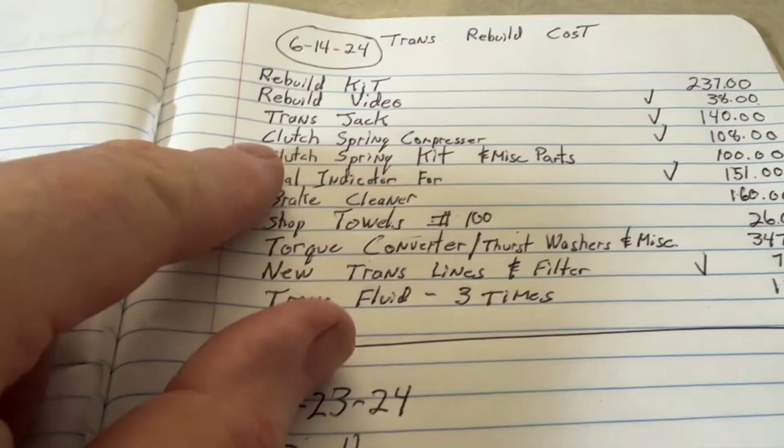Yeah, I decided to add up the cost to rebuild the transmission. Remember, I've never done it before, and I didn't have the right tools. So I got a trans jack, a clutch spring tool, some parts, a dial indicator, brake cleaner, shop towels, torque wrench. The torque converter cost $347. I don't know if I needed it, but everything with a check mark, I would not have to buy.

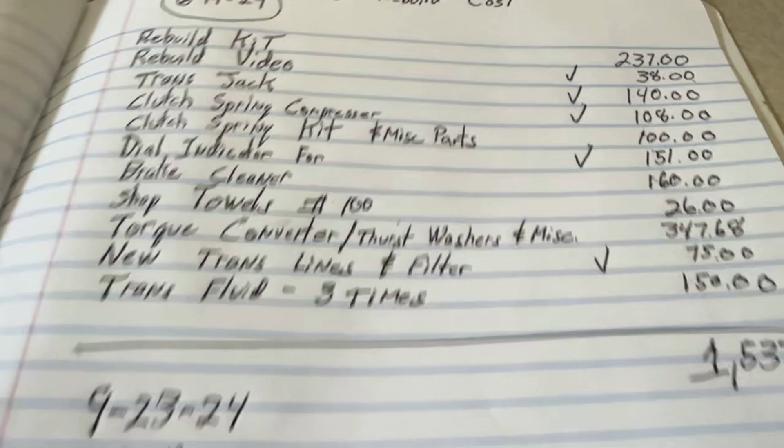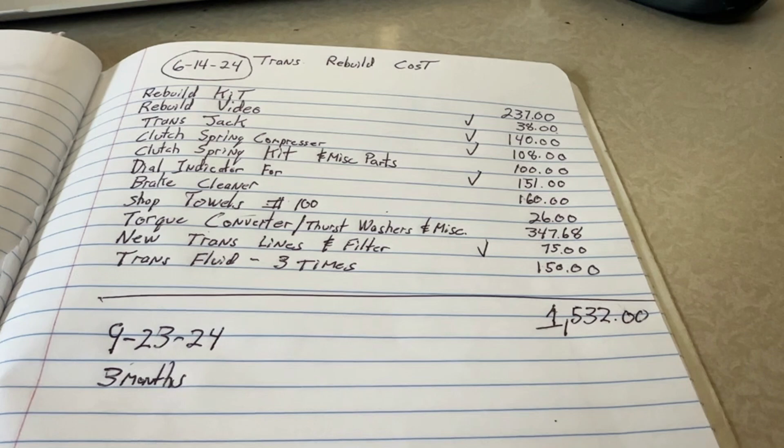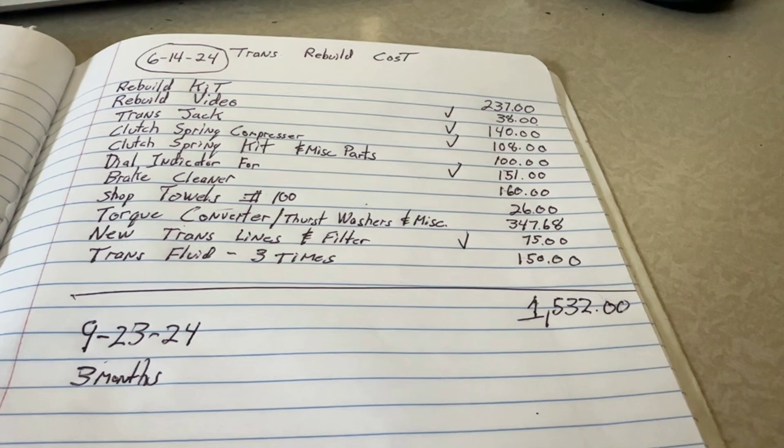But I really did it because I wanted to know how to do it. So getting back to the beginning, I asked them if I brought the transmission in, what would they charge me? They said I think it was $1,600 to $1,800. If I took the car in and they just took the transmission out and everything, it was like $3,500. I bet that didn't include the torque converter, which if you take the torque converter price off, it goes way down. So yeah, I bet if I was to do this again, I could do it for like $800.

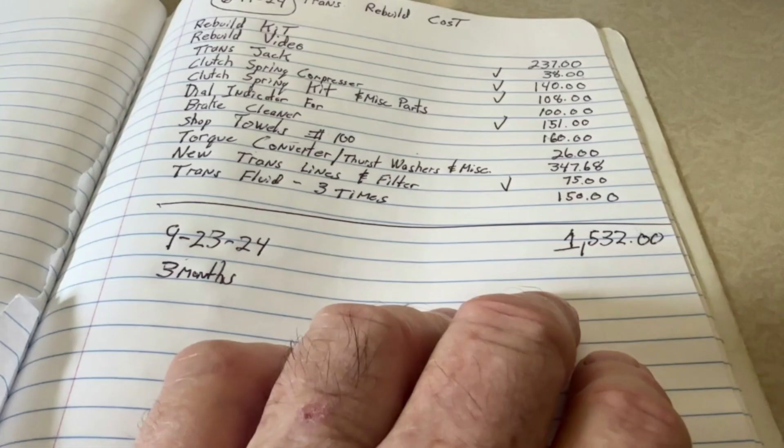Okay, I want to buy a muffler for this car, but I don't want to spend a lot of money because I don't know what's going to happen in the future of this car. I just want to see what size I got. That's my starting point.

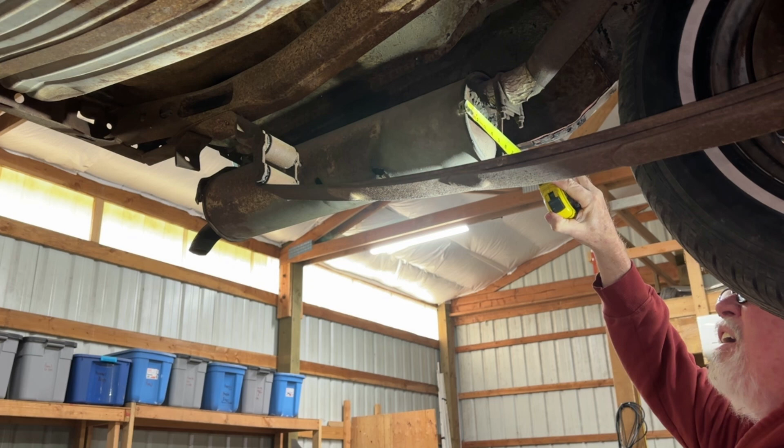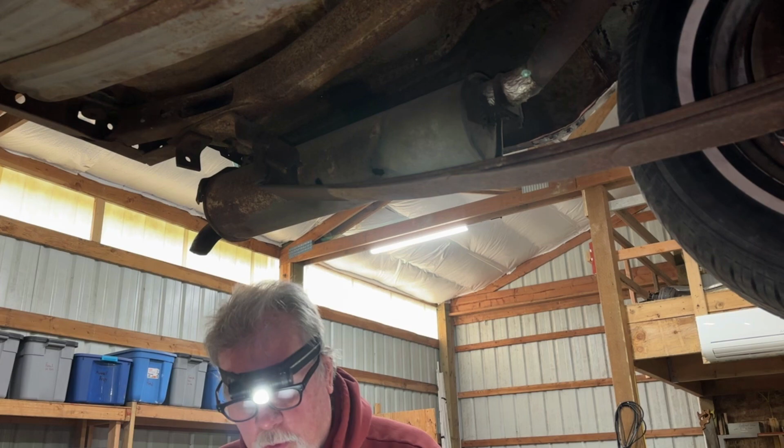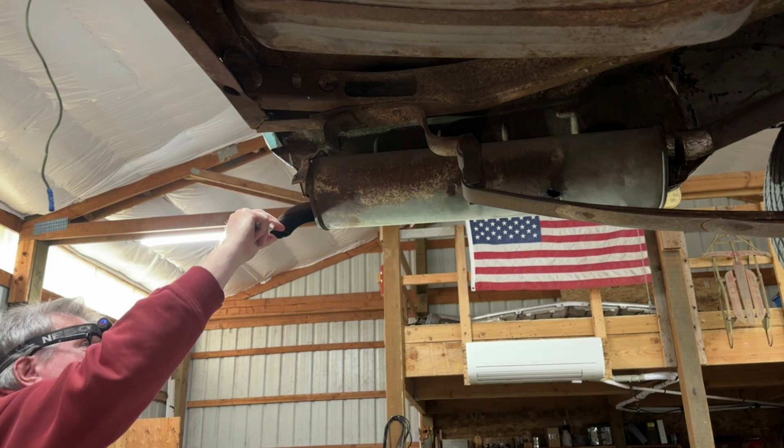So it's about 6 inches, about 6 by 27. It's like 2 inch. On the other end it has a built-in... I don't know if it's built in or not, but it sure looks like it. I think this was attached to the muffler, to the bumper I mean. So I'm going to be looking for a really cheap muffler.

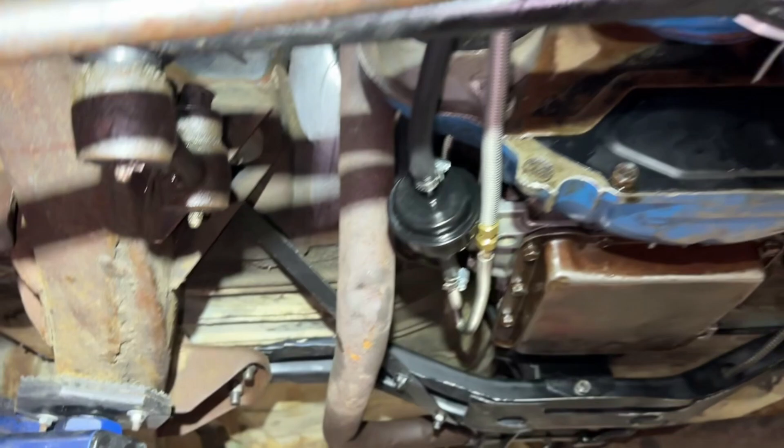Let's go look towards the front. When I shoot videos, I don't always show things that are clear because it takes time, but here's that. We'll go up on top in a second, but here's that line, like it's broken off. In fact, I'm gonna just get rid of it. It went up to the carburetor. This is that heat exchanger thing that I don't know anything about.

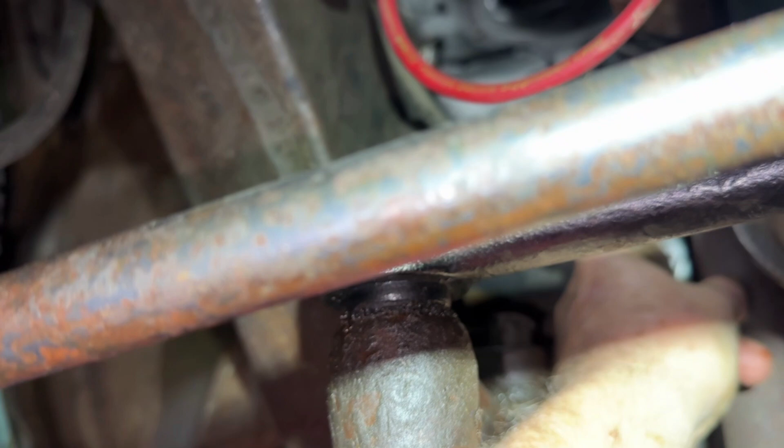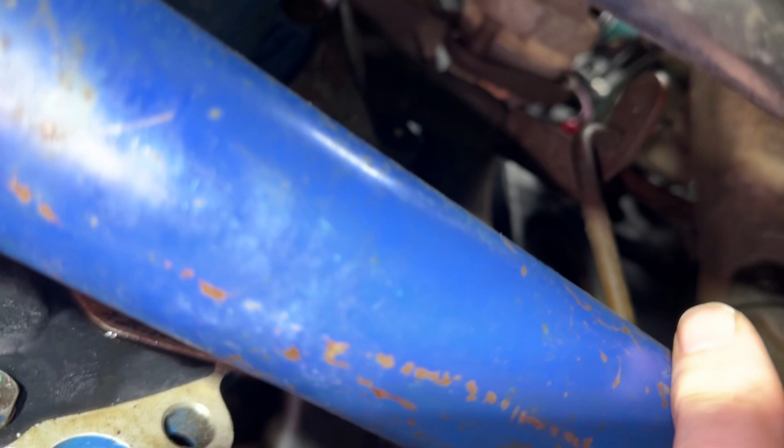Also, when I was here looking, I noticed, you see right here, in beyond, that's a flap. I think that's to let cold air in. I wonder if that should be open like that. And the other side, looking up through there, that's open too. In my last video, I don't know if I explained it good enough because I don't always take the time.

First problem I had, I don't know if it was last video or I don't remember. This shift linkage, I took the pan off and I took the valve body out, was not in the slot where this would lock in. So I replaced that.

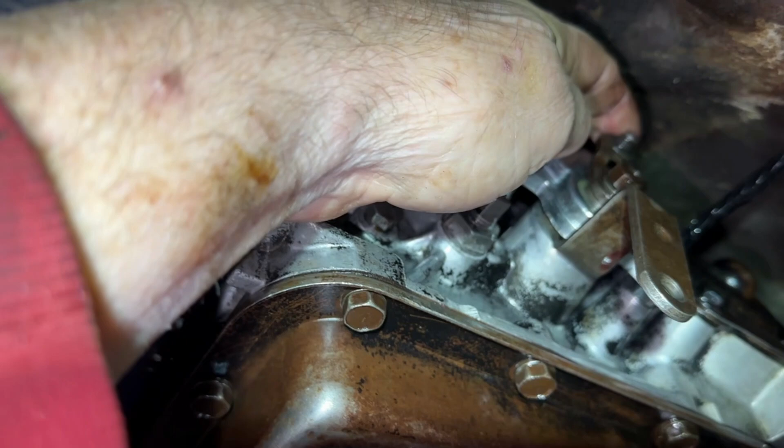I mean, I took it apart, got it on the slot, tightened it back up. But then I realized that, so this is the shift and this is the downshift. That downshift somehow I did not have lined up. So you see why it's moving right now? It was locked up.

Which meant it restricted the gas pedal from going a certain amount. Because when you push the gas pedal down, at a certain point it pulls the kickdown or the downshift, however you want to call it. Now just looking at this, anybody that's curious...

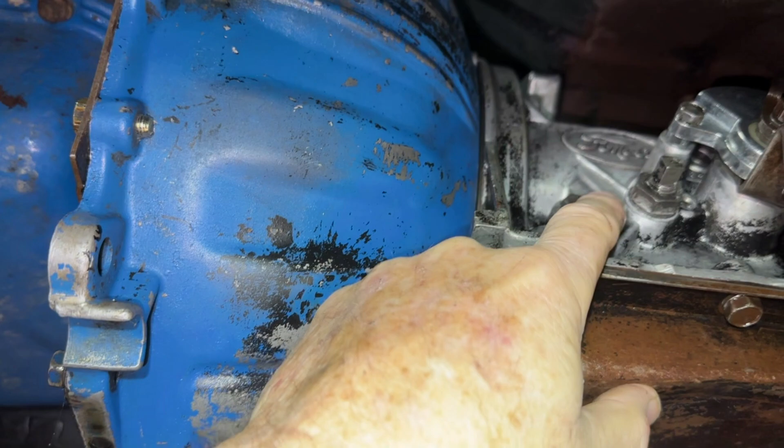We know, if you watch my video, this is one of the band adjustments. Thought my pump wasn't working, but right here is a port that you can hook up a pressure gauge to see what kind of pressure you have, basically to tell you if your pump is working or not. But in my case, it just, who knows.

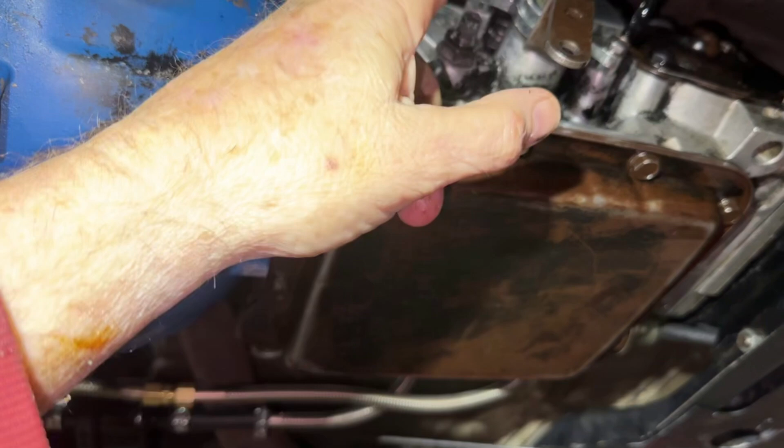But now, like I said, I took this apart 3 times. I took it apart to hook it up. I got this fixed - you lower the valve body. If you go to where I explain how to put the valve body in...

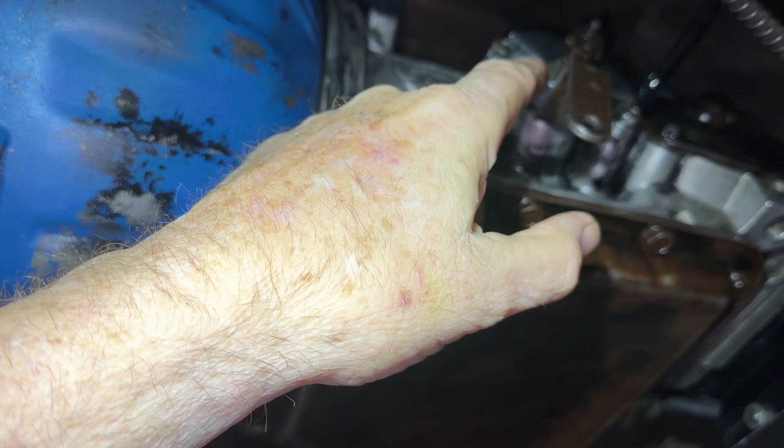Anyway, when I fixed the shifter, I screwed this up. Took this off. Let's see, how did it work? There was a really tight bend right up in there. I didn't bother doing the bend - you can do it however you want. But this is what I got.

So again, this is the back of the transmission, so that's when the fluid is leaving the transmission. The front one is when the fluid is coming into the transmission. So I got the filter - if I didn't explain this, I got the filter on when it's coming back in after it's coming out of the transmission, out of the radiator.

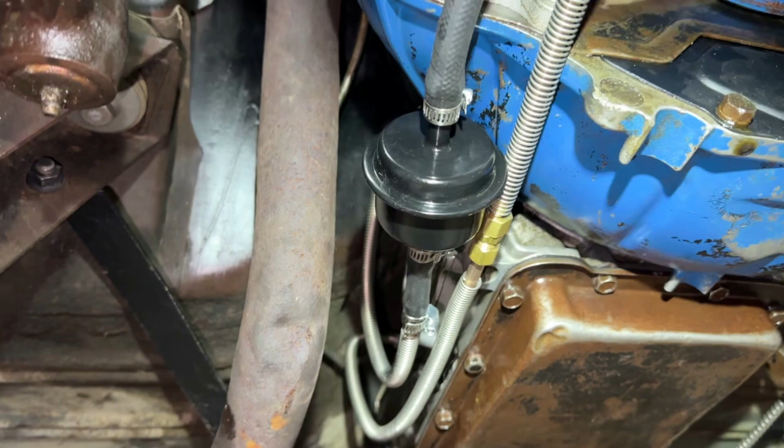Where I figured it would be the coolest. I mean, I don't know what's inside there - paper, metal, I don't know. But if it's paper, I sure don't want it heating up too much. Then I put this compression fitting here. No leaks.

So, first thing today, I gotta hook the linkage back up. So that's the shift linkage, and then I gotta hook up the downshift linkage. It's right here.

Okay, and then I didn't tighten this. I was just tired. So I gotta tighten this down. I'm gonna clean it, put thread lock on it, Loctite.

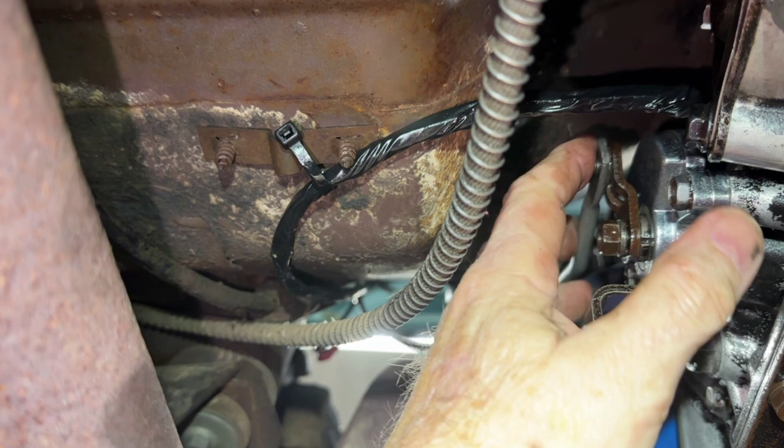Put the C-clip, put this back together with the cotter pin and the 2 washers. I'm just looking around what we got down here. Look at this.

What is that? That might be a block heater. There's a wire coming off of it. I wonder if there's one on the other side. The mysteries of old cars.

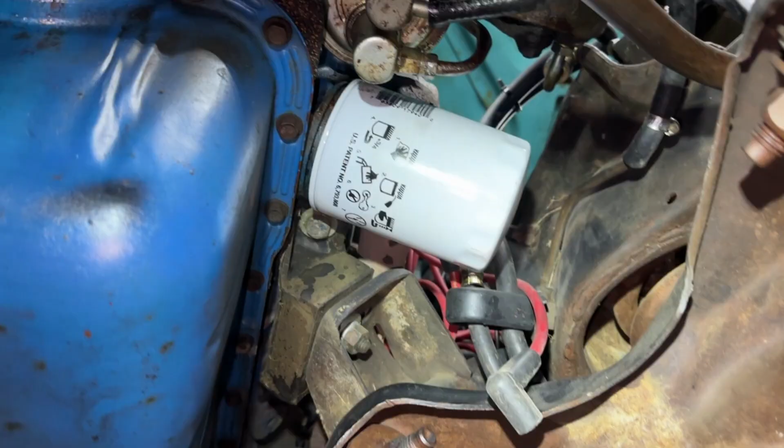Let's see, I was saying that the fuel pump was disconnected while we're here. Here's the fuel pump, the mechanical fuel pump that works in the engine. It's plugged, and it's plugged up on top. I think I showed that in the last video.

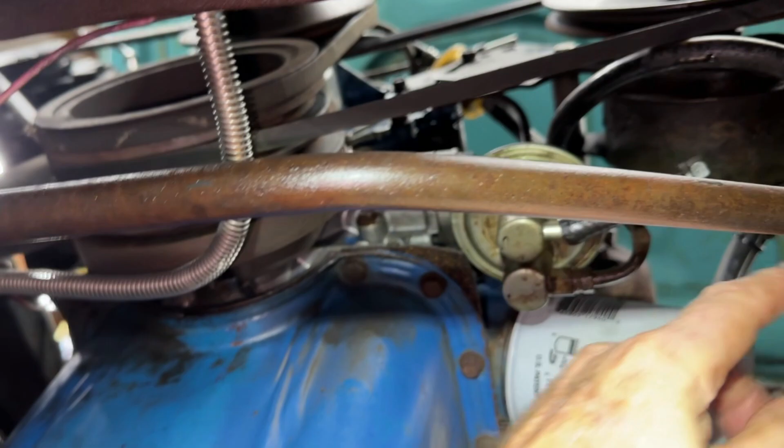So it looks like they just took this line. Here's the line going to the fuel tank. It used to go to here. They bypassed it and went straight up.

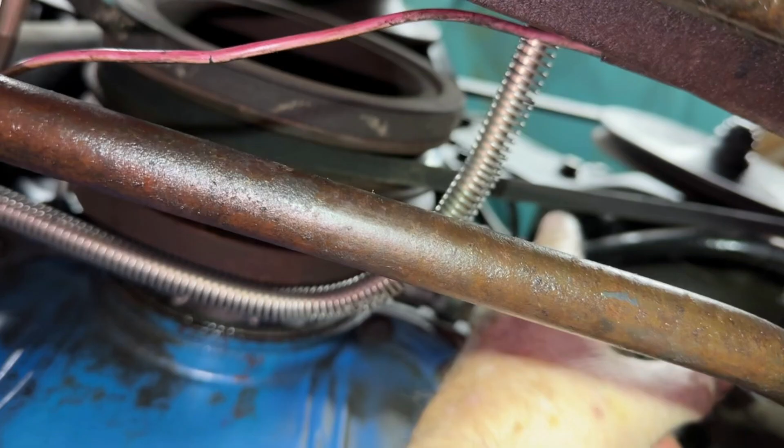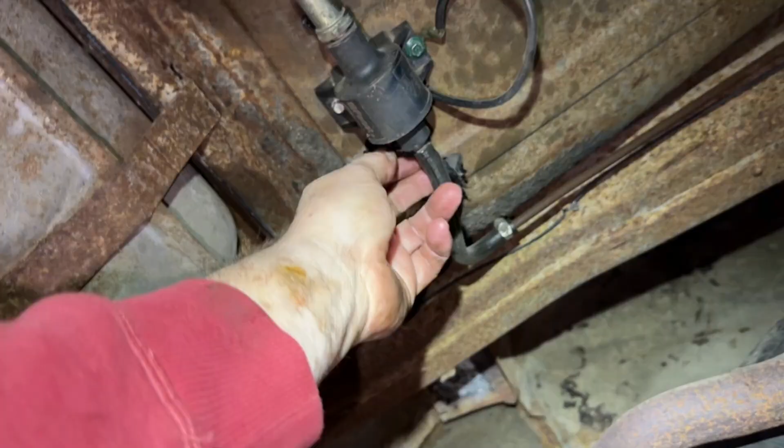And somebody added electrical. This is how they got wire to the pump. It goes into the trunk. And then somebody added air shocks. I don't think it came stock with air shocks.

So I'm just going to clean that off a little bit, so I can get some Loctite on there. C-clip back on, I put Loctite on here. I think the reason I use Loctite, I thought I might have stripped these threads a little, just barely. So now we know that's in place.

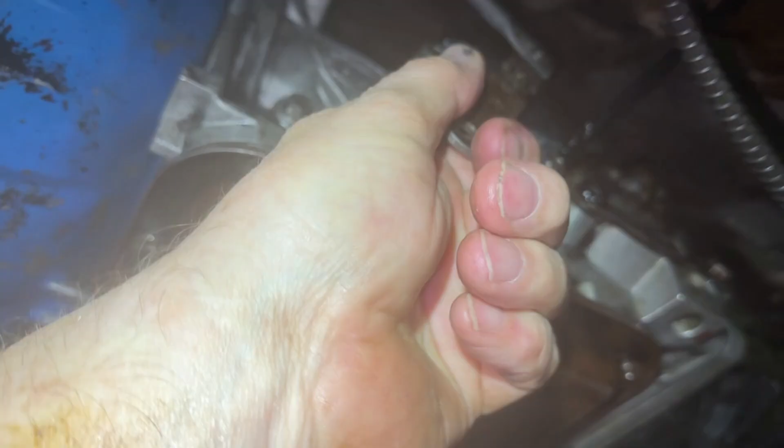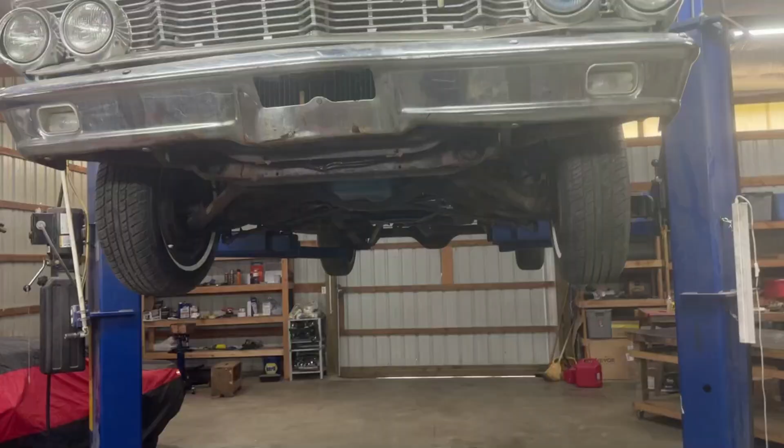Put this, okay, I got that back on. Another thing, I got all the leaks cleaned up. So if anything leaks, I'm gonna know about it.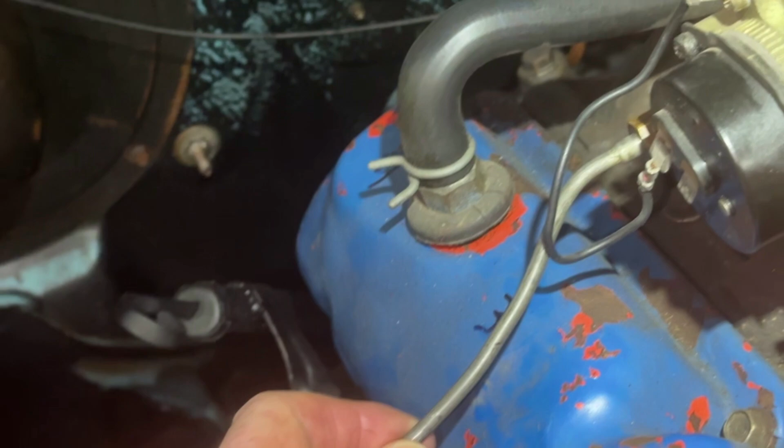Yeah, just to follow up, because it wasn't clear, this is where that tube was that was going down to the exhaust manifold. I think it's just heat. So look at this wire just sitting on the exhaust manifold.

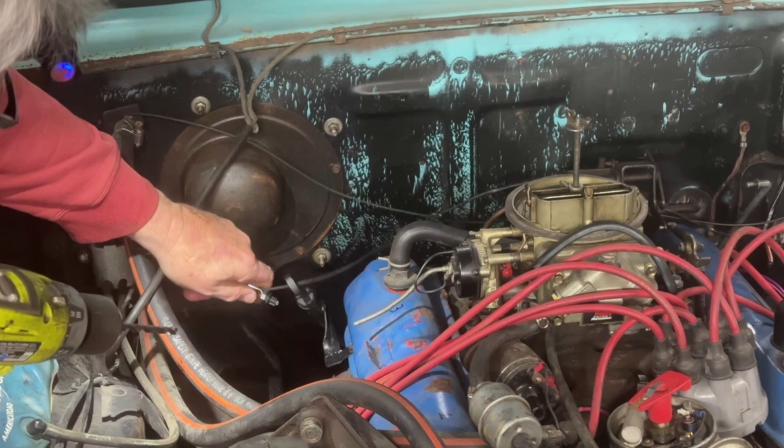Well, I guess I gotta undo that bolt, because at least get it to hold it up for now. Yeah, this loose wire is bugging me. So at least temporarily, I'm gonna use one of these zip tie things, or whatever they call that I bought. Insulation behind it.

Turn it a little bit. Yeah, there we go. Handy little things.

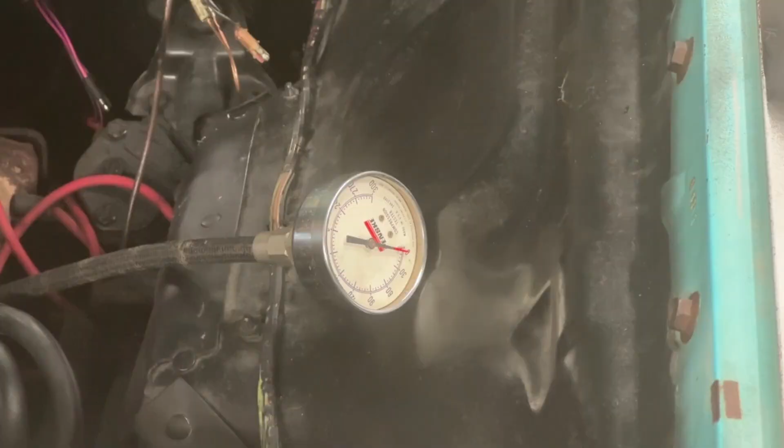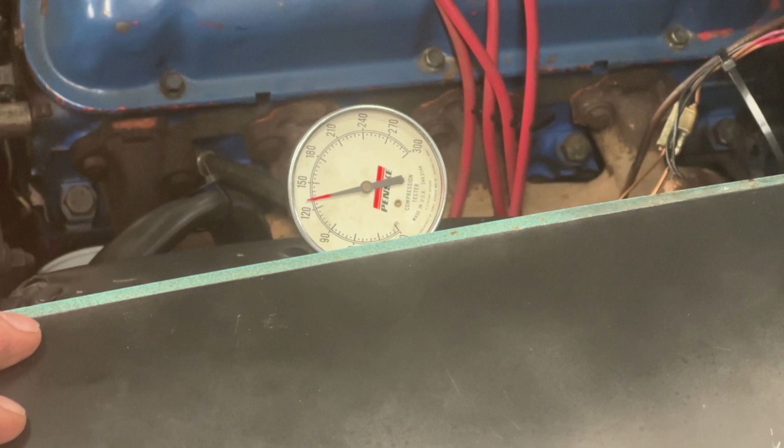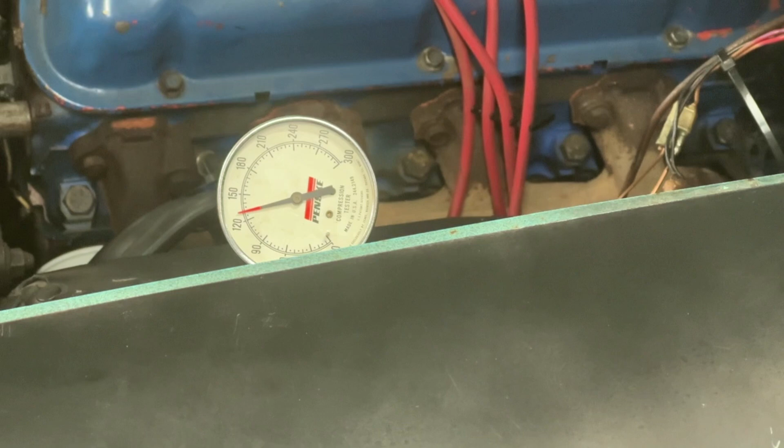This is cylinder number 5. Okay, I did 8 revolutions. It's about 130. Number 6. It's about 160. We're gonna do it again, 8 revolutions.

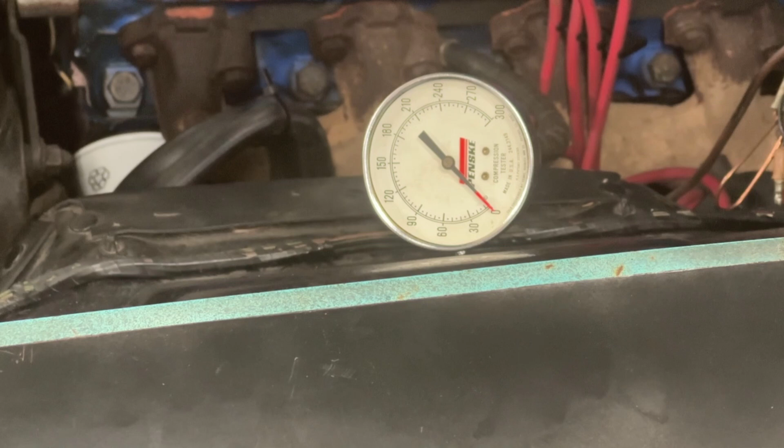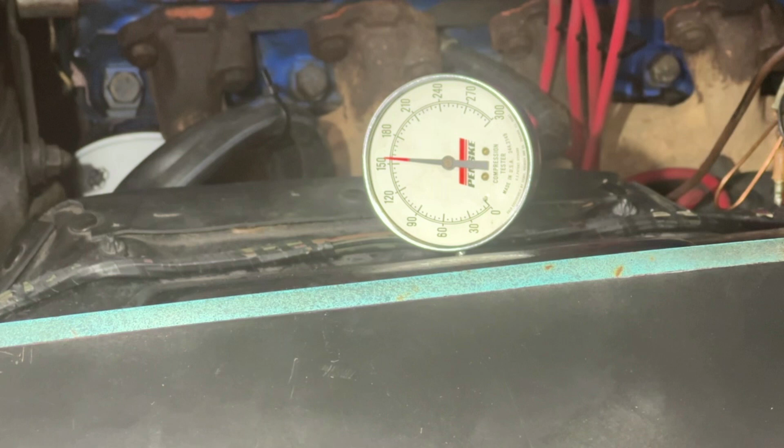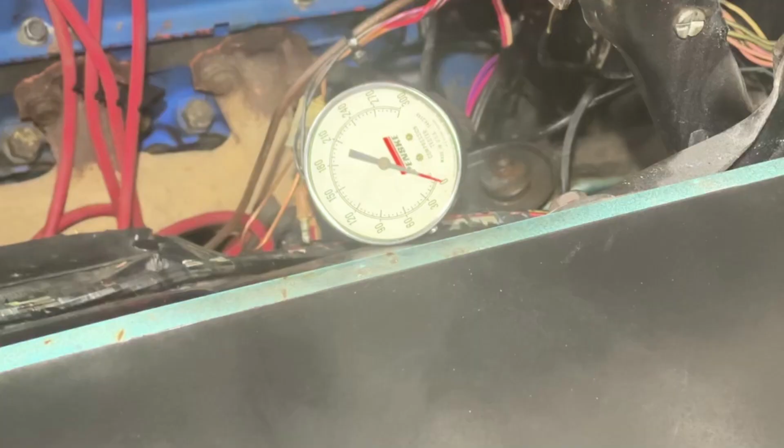Call it 155, call it 157. Cylinder number 7. 150. Do it again. 150. Cylinder number 8.

114 about. Do it again. 110, 114, we'll call it 112. 112 on cylinder 8. Cylinder 4.

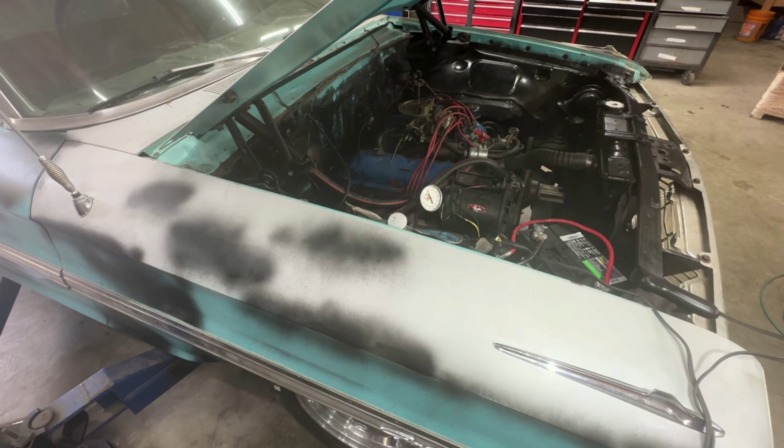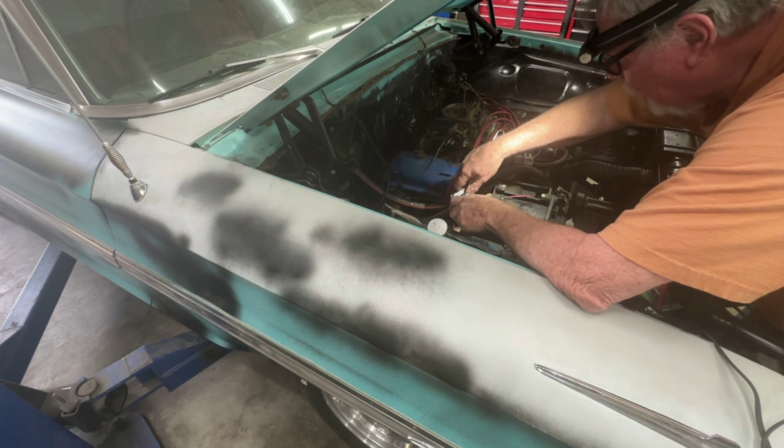Try it again. You see why it's dropping like that? I think it's got a bad valve or something. So what was it? I forgot what it was. Let me go do it again. I think it was 120. It would be 130 if it could hold.

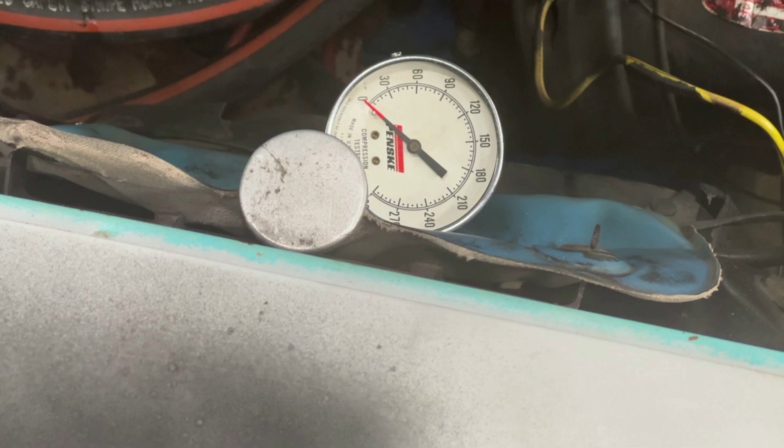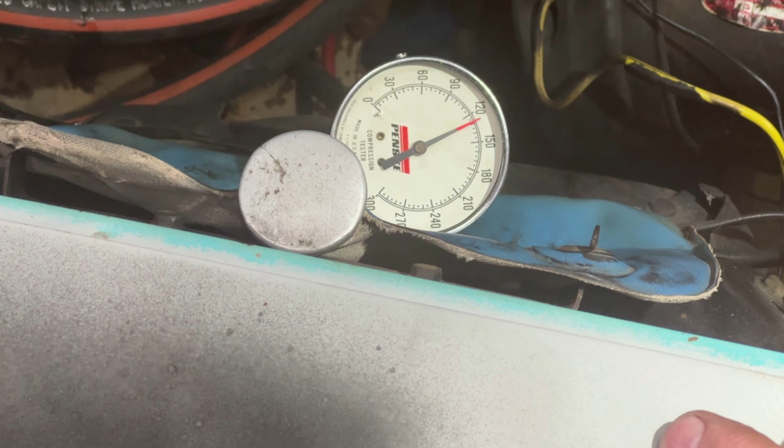Okay, number 3. See it leaking off? It was at 140 at the high point. Eight more times. 140, we'll just call it. Okay, number 2. That's just the way it's threaded in, I can't help that.

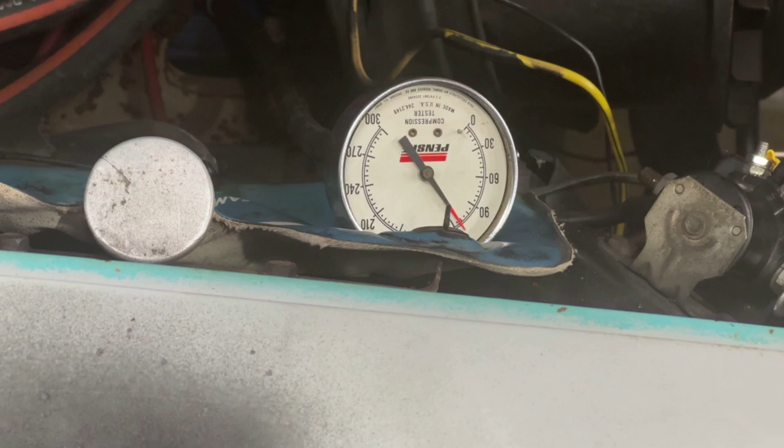There's something wrong on this side, like a bad head gasket or something, because they're all leaking off. Let's do it one more time. About 135 it reached. Number 1.

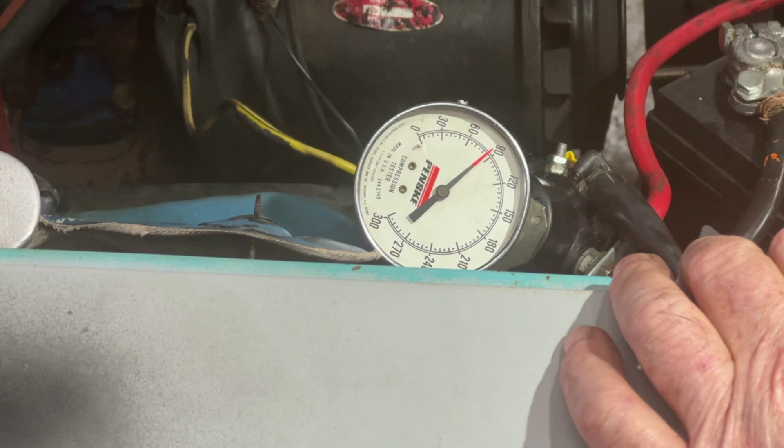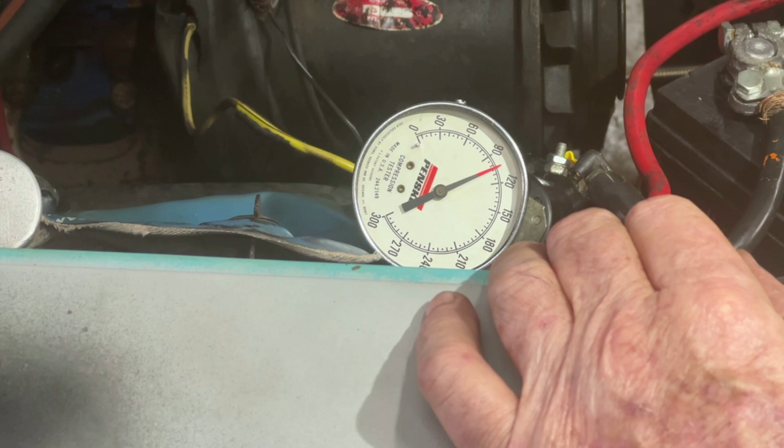That one's leaking off too, but it did reach 120. Do it one more time. 120, leak off. Okay, here's what we got. So right now, 1, 2, 3, 4, 5, 6, 7. Okay, 120, 135, 140, 130. All these leaked.

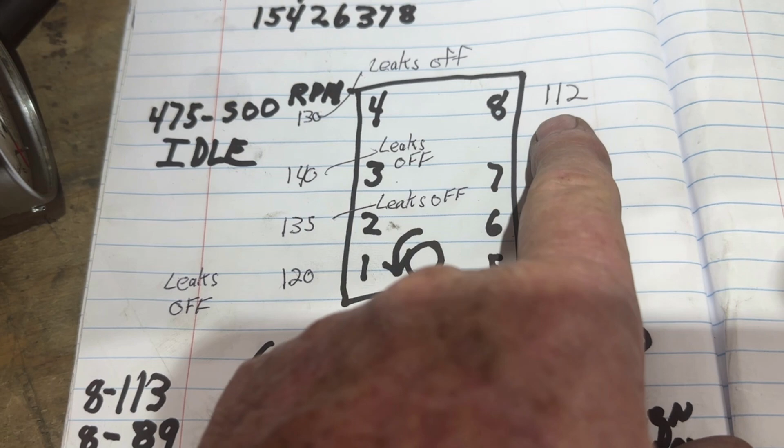130, 157, 150, 112. So for the heck of it, I'm gonna put some oil in number 8 and see if the compression comes up. I'm gonna put some oil in the easiest one to get in and see what happens.

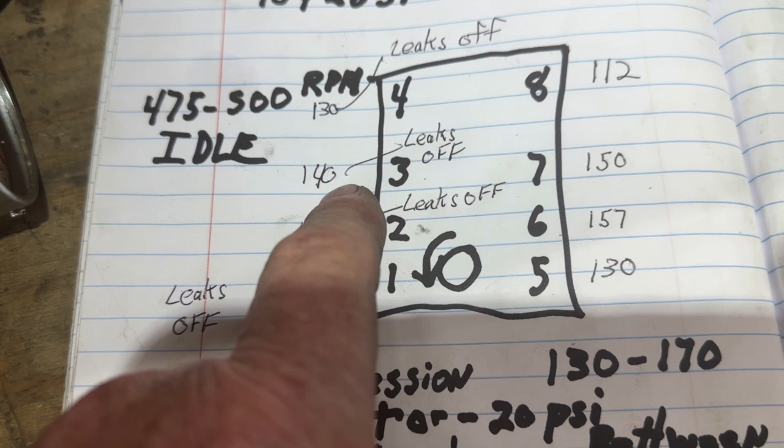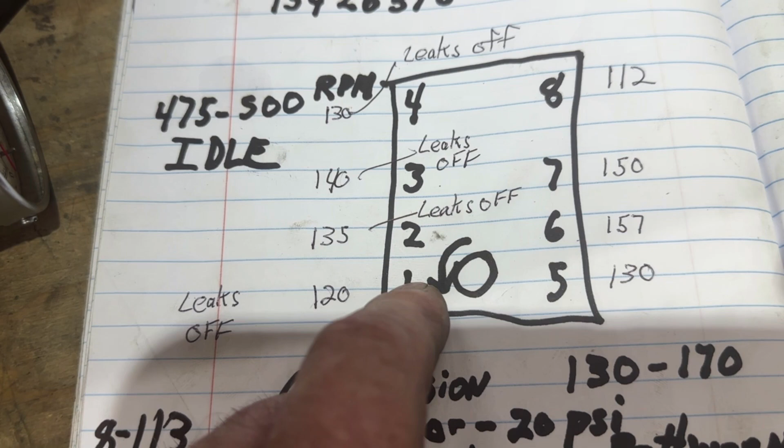Let's just start on this side because I'm on the side. I'm just gonna squirt a little bit of oil, and well, I know it's not gonna fix it because it's leaking off, since all 4 are leaking, it's either a crack or a crack in the head or the block, or it's head gasket. That's my guess.

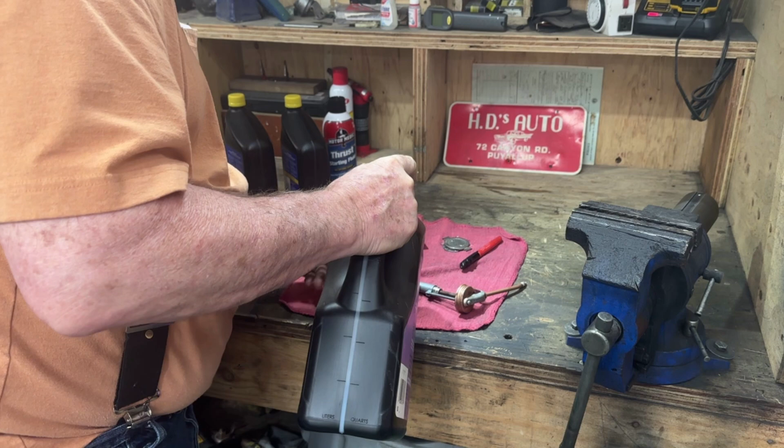Okay, I'm just gonna use regular oil, but this thing's low. Just using whatever I have, 10W30. We'll just make sure it squirts so I know when I'm squeezing the trigger, it's going in the cylinder. Okay, there we go, I'm gonna do like 4 shots. What the heck?

Okay, I'm gonna do 4 shots, and number 4, remember I marked them on the top just so I'm old. So I'm gonna stick it right in there. 1, 2, 3, 4.

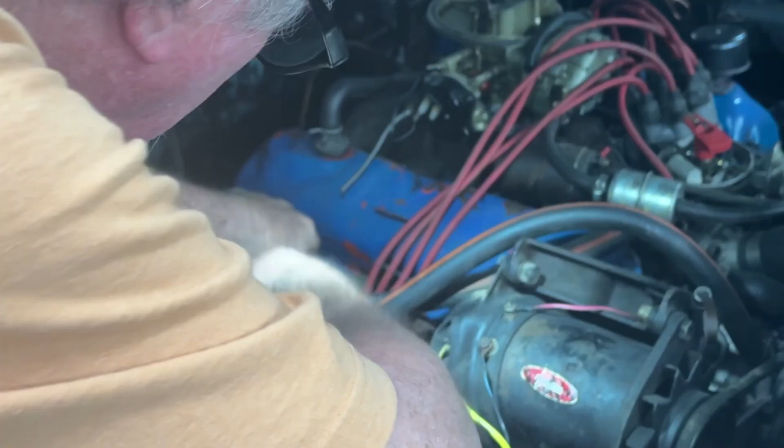If the rings are bad, then the compression should come up higher. Let me go see what it was. That was number what? Number 4. Number 4 was 130.

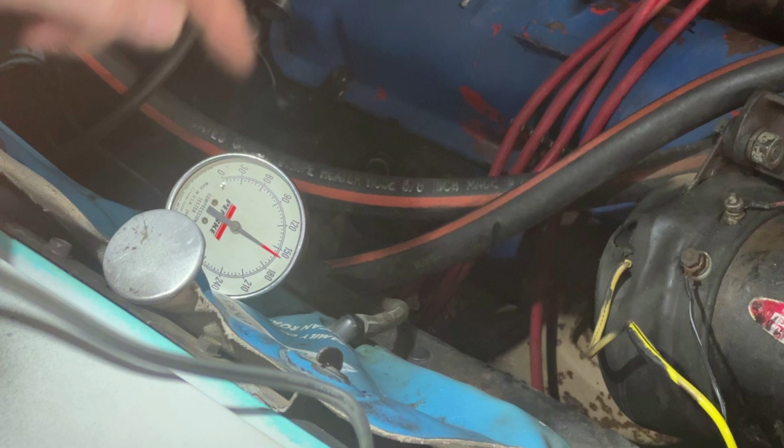Okay, I'm gonna squirt some oil in number 3. 1, 2, 3, 4. Just drop my gauge, there we go. Finally, I think it was 140. We'll look at it later.

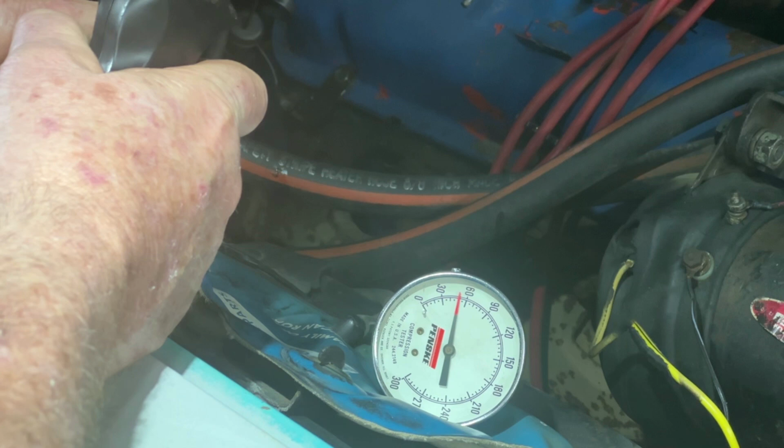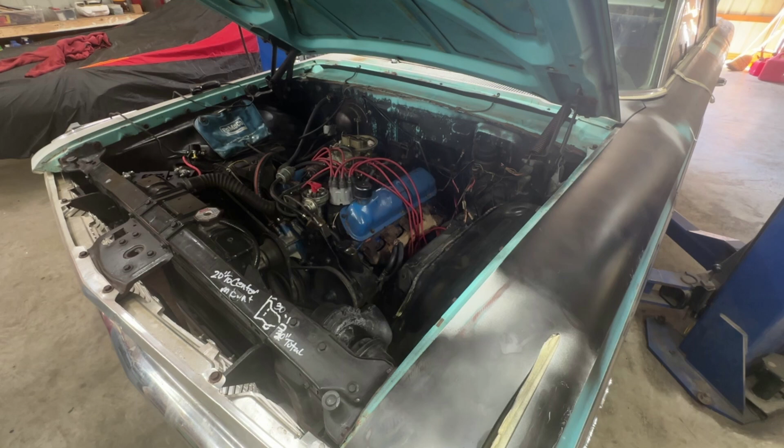Wow. 170. 175. And holding. What a trip. See, I'm going to squirt some oil in number 8.

Three squirts. Let me try it. Four. We'll make sure this thing will squirt upside down.

So we might not have got a full 4 in there. Let me see if I get a better angle. I know we got 1 in there, so 2, 3, 4, that's better. I got 4 in there now. Okay, cylinder number 8, I put 4 squirts of oil. I got that magnet there to keep this gauge from sliding off.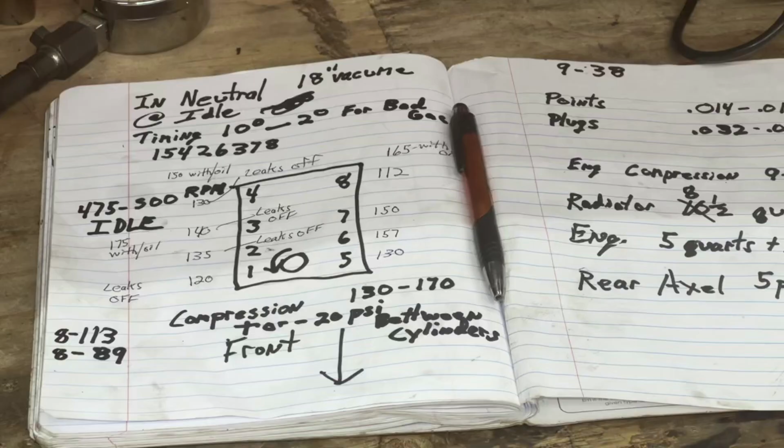$165. Okay, now I know this is crude here, but I didn't feel like making another drawing. So we'll just do it one at a time.

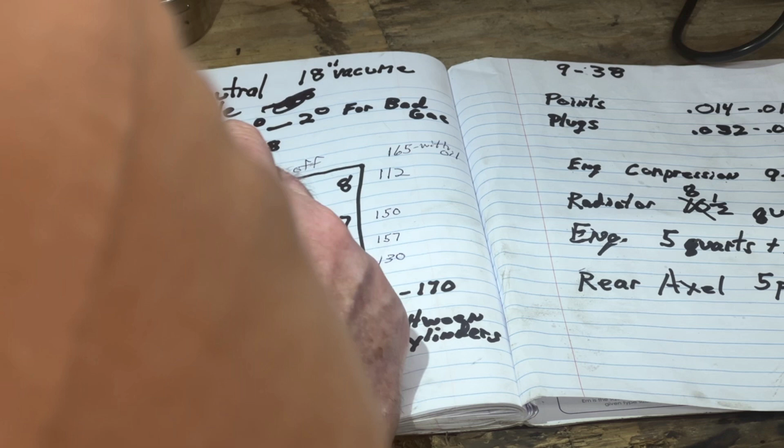Number 1 was 120, it leaked off. Number 2 was 135, it leaked off. Number 3 was 140, it leaked off. Put oil, it held at 175. Number 4 was 130, it leaked off. With oil, it went up to 150. Number 5 was 130, number 6 was 157, number 7 was 150, number 8 was 112. Put oil in number 8, it went up to 165.

We got a worn out engine here. So this is the reason, in my opinion, not to go too far until you figure out what's going on. There's a whole bunch of problems, and the best thing to do is just yank out the engine. The main thing with me with doing this is it just creates another mess.

I don't have parts everywhere, so before I start, I gotta clean up everything again, make plenty of room. I'm curious to see what's underneath the carburetor too. Is it a stock intake manifold? What is going on with this engine?

So I might pull the heads off, pull the intake, pull the carburetor, pull the intake manifold, pull the distributor, pull the heads, pull the exhaust manifolds, and then pull the block out.

Sometimes it's better just to get rid of this whole front end, just get it out of your way. But I don't know if I'm gonna do that. Anyway, that's where I'm at.

I'm not discouraged because this is just a hobby. I want something to do. It doesn't matter how fast I do it. Anyway, if this is your first time tuning in to me, I'm just doing this for fun. People can watch if they're interested. I'm 69, I'm retired, I just need something to do.

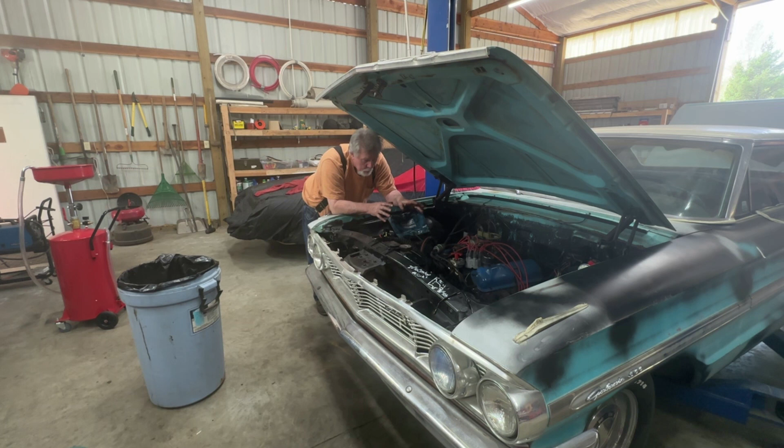So that's where I'm at. It's 3 o'clock Monday, I'm not ready to pull anything off right at this minute. I need to clean up everything and make room to put everything and keep it in order. I'm going to take a bunch of pictures, especially of how the power steering is mounted, how the fan is, where the radiator is, where the generator is, which I might switch later, but one step at a time. I'm not really sure. All I know is I got to pull the engine.

What I want to do and how I want to do it, I'm not sure. And this old list for the transmission, it's done. The only thing I didn't check was the brakes. But I'll tell you, man, this pedal feels really good. It's like somebody has just rebuilt the brakes.

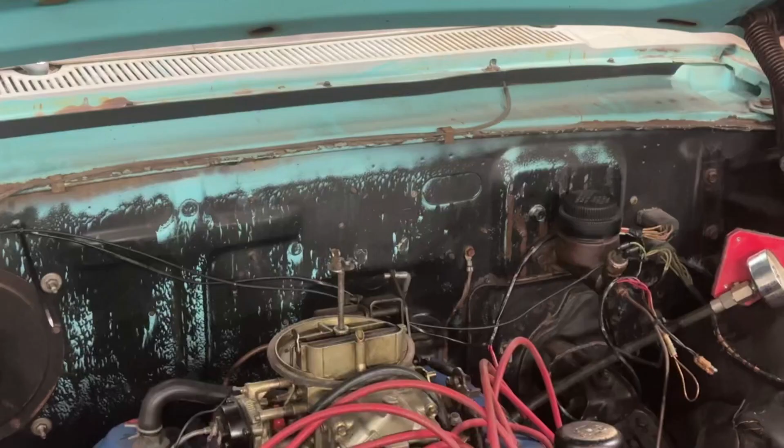So this is done. While I'm cleaning up, I decided to put one more of these in. Either way, I don't like these loose wires. So I drilled another quarter-inch hole.

Just that little bit cleans it up, and it makes for less of a mess for me. So as usual, before I do anything, I gotta clean up. I mean, it doesn't look like much, but I got stuff all over the place again. So I'm gonna do that before I stop for the day.

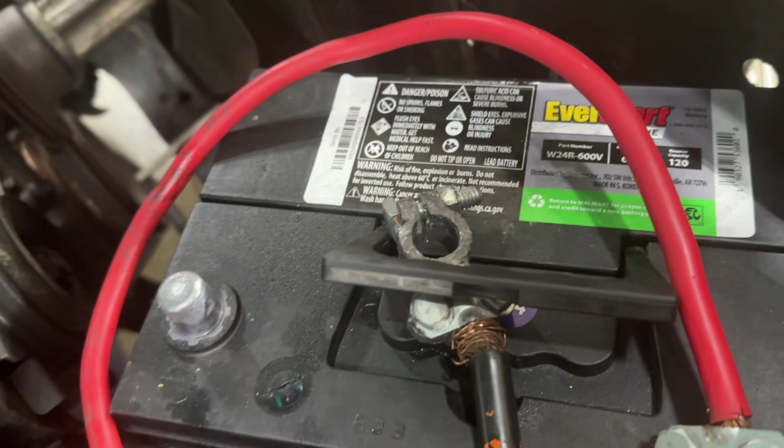Oh yeah, I wanted to say one more thing. I looked for the cheapest battery I could find. This battery works great, you can hear it cranking over. It's got 600 cold cranking amps. This came from Walmart, it was like, I forget what it was, 50, 60, 70 bucks. It's the right size.

It's good enough. I mean, with these old cars, you don't have a lot of electronics. There's no air conditioning, it's all really basic. You don't need that much cranking amps. So I highly suggest, if you got a hobby car, buy a cheap battery from Walmart. Yeah, I thought I'd throw this in the middle.

I don't know who watches these videos, but if you decide to do a compression test, get one like this. I mean, this has got an adapter on it, but the point being, it's got an air fitting. When trying to get into some of these tight spaces with a long line like I was showing in the video, it's a bitch. You want this as short as you can get it. Unless you got like overhead cam newer engines.

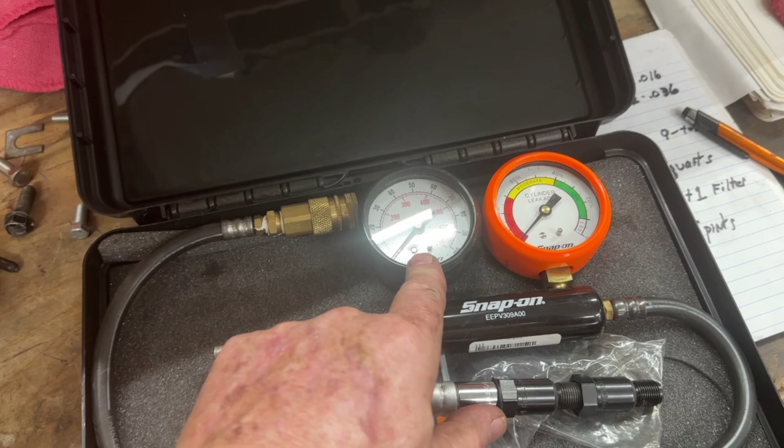But as short as you can get it and flexible. Again, this is a leak down test. This will also do a compression test. But the point is, you want to get a short piece that you can then snap into your tester.

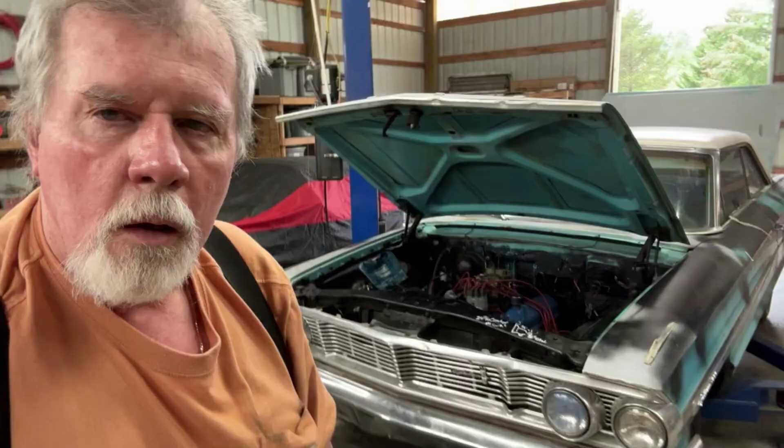Yeah, this is like the end of the video. I decided to put the spark plugs back in and fire it back up again before I take it apart, because I had drained the transmission. I want to pump the transmission full of fluid so I don't forget in the future. And that's it, so it won't be much work.

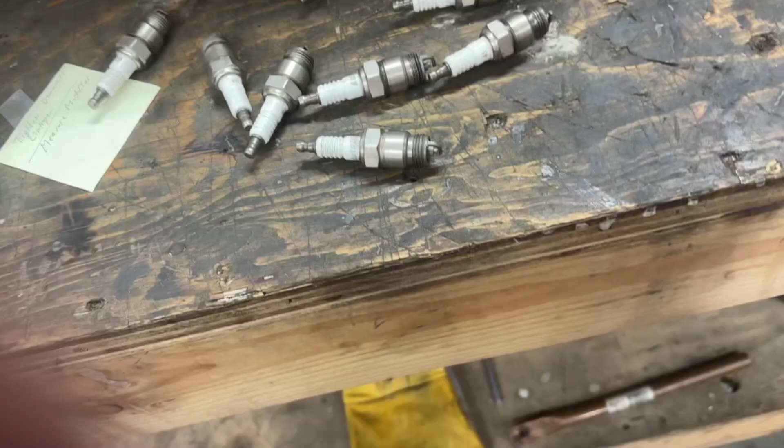I think I'm going to put my spark plugs in the sandblaster and clean them. Okay, I cleaned all the plugs up with the sandblaster, it came out really good. So I'm going to set the gap. I'll just set it somewhere between 32 and 36.

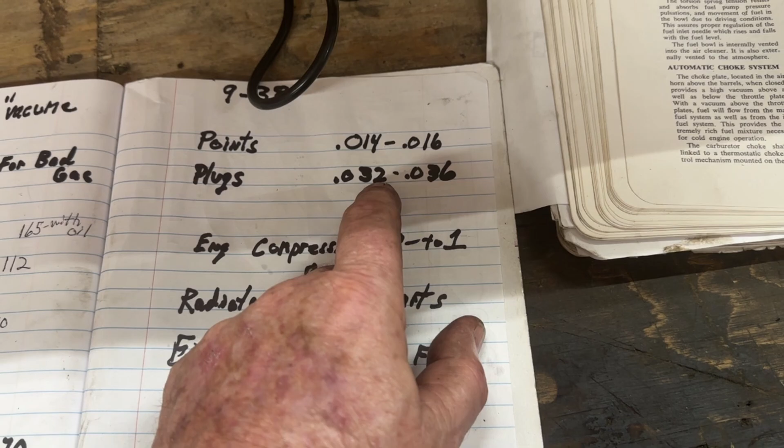What I did forget to do, I got the plugs back in except for number one. I forgot to mark the wires. So I'm going to have to reach in there and feel the compression. Right there. Let's see here.

It's either this one or this one's number one. That one's going over there, so it must be this one. And no, they don't have them in order. So then I put this up. I'm gonna hook it up that way and we'll see what happens.

Okay, this is curious. One, 15426. Well, I think this is number one. And this should be number 5, but they had it running over there. 1, 5, 4. Let's see, 1, 5, 4. 2 should be over there.

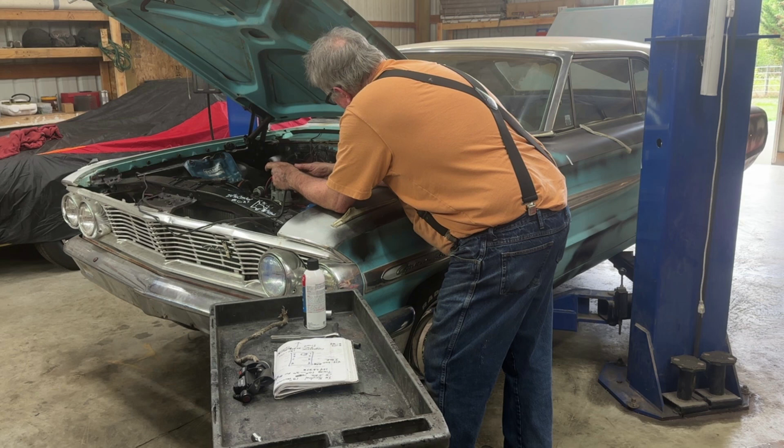Backfiring, I got the timing off. I'm gonna have to do that tomorrow. I must have been off on the compression, or I spun past it once. Tomorrow, I'm out of time.

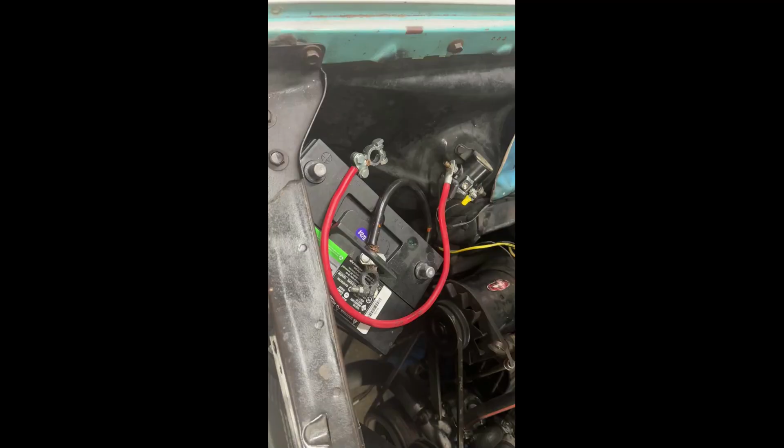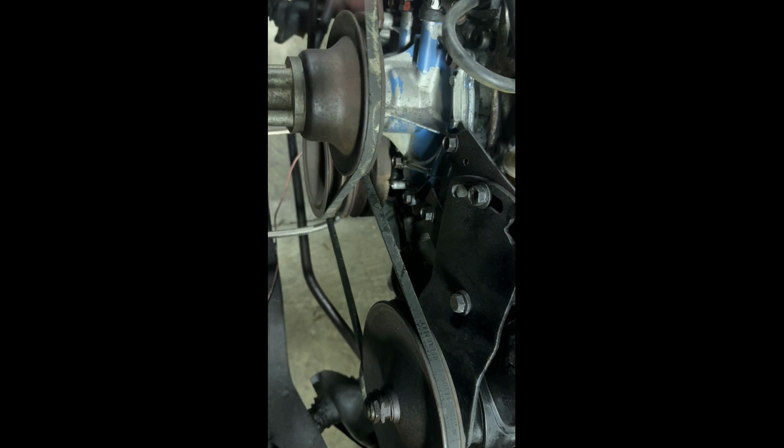I'm getting in my car. I can't get this camera out any further. I just left inside. The good news is the engine's not frozen. That's good.